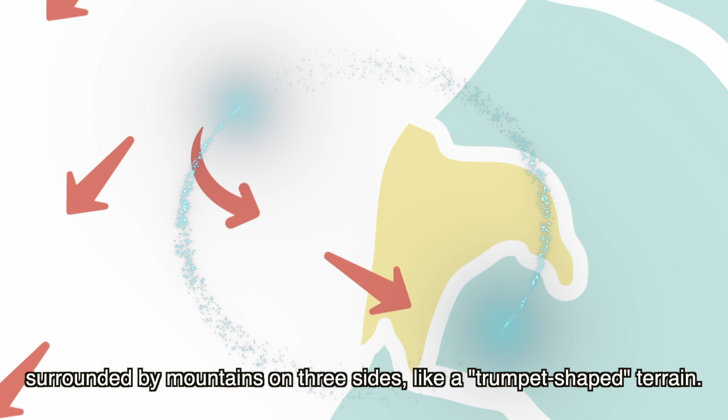Hsinchu Refuse Resource Recovery Plant. Hsinchu City is located in the northwest region of Taiwan, surrounded by mountains on three sides, like a trumpet-shaped terrain. Strong gales blow directly into the area, earning Hsinchu the title of Windy City.

Hsinchu is known as a tech town because Hsinchu Science Park is the bedrock of development for Taiwan's high-tech industry. It not only stimulates the advancement of domestic industries, but also marks Taiwan as a world-famous leading high-tech center.

Although Hsinchu City is densely populated, trash disposal is not a problem because the Hsinchu Refuse Resource Recovery Plant provides local residents with trash collection services and appropriate follow-up treatment. The facility is well designed and is now an ideal attraction for education, entertainment, and sightseeing.

The plant is located next to Nanliao Fishing Harbor on the 17-kilometer coastline scenic area, covering a total of 5.5 hectares. In addition to the Hsinchu City Environmental Protection Bureau building and incineration plant, the exterior of the recovery plant is designed by a world-renowned architectural firm, whose works also include the Luz Chapel and the Bali Refuse Incineration Plant.

The glass outer wall highlights Hsinchu's glass industry, and the building's silvery white and green hues are the perfect complement to a background of ocean waters, sandy beaches, and green land. The Hsinchu Refuse Resource Recovery Plant was officially launched in 2001 and has been in operation ever since. Currently, it is operated and managed by Rongfu Company Limited.

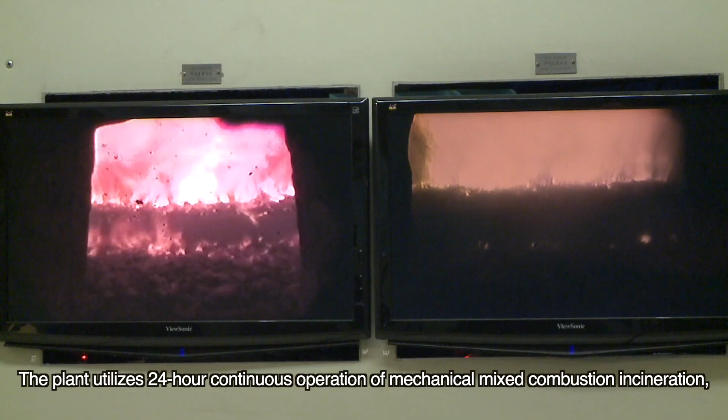The plant utilizes 24-hour continuous operation of mechanical mixed combustion incineration, and the maximum daily refuse treatment capacity is 900 metric tons. In addition to servicing Hsinchu City, it also cooperates with and assists in the treatment of household waste and general business waste for the greater Taoyuan, Hsinchu, and Miaoli region.

According to statistics, recyclable resources account for approximately 51.1% of total garbage, so recycle and reuse is extremely important. Household refuse can be divided into three main categories. The first is kitchen waste, the second, recyclable waste, and the third, general waste. Kitchen waste includes cooked food waste and raw food waste, which can be composted into organic fertilizer and returned to the land.

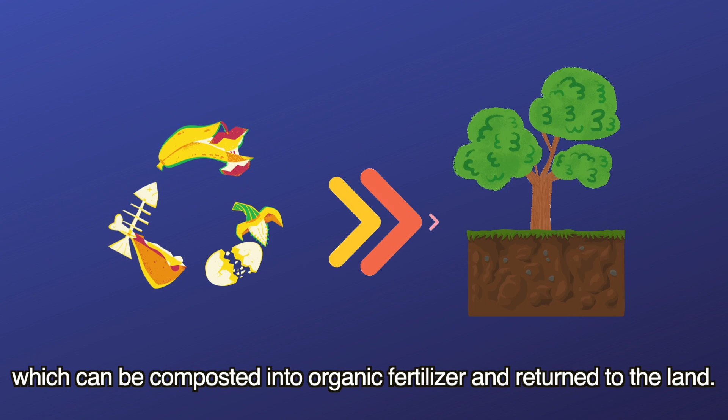Recyclable waste is trash that can be recycled and reused, including paper, glass, plastic, metals, and organic matter. With proper sorting, recycling, and reuse, it not only reduces burden on the environment, but also saves refuse treatment costs.

General waste refers to those other than kitchen waste and recyclable waste. It is divided into two types, combustible and non-combustible. Combustible waste is sent to the incinerator for high-temperature incineration treatment, while non-combustible waste is sent to the sanitary landfill.

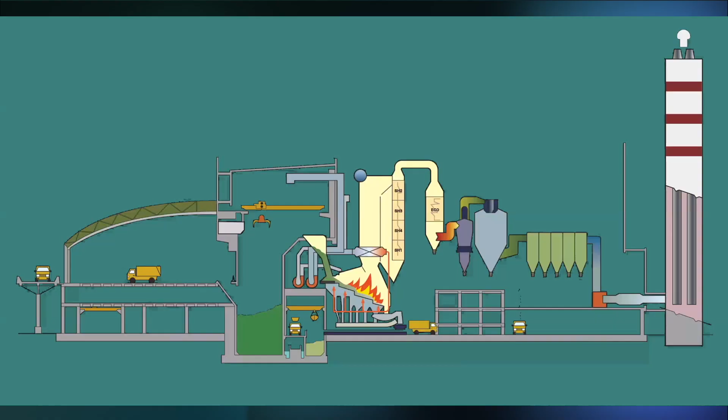But do you know how the previously mentioned waste incineration and landfills are conducted? The treatment process of combustible refuse includes refuse entering the plant, dumping, grabbing and transporting, incineration, flue gas treatment, and ash removal and disposal. Now, let me walk you through the entire process.

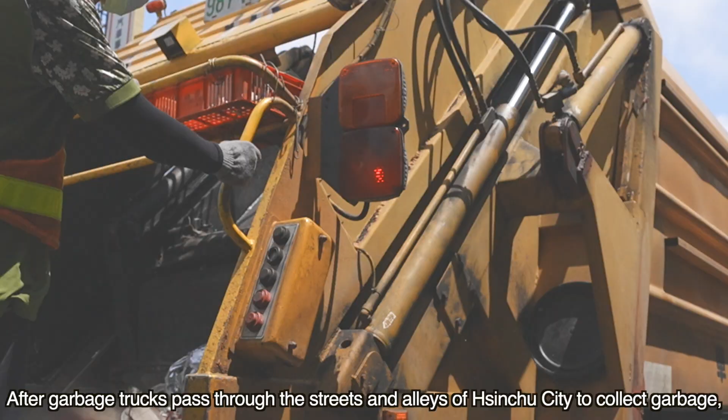After garbage trucks pass through the streets and alleys of Hsinchu City to collect garbage, they return to the Refuse Resource Recovery Plant. Upon entering the plant, the vehicle must first be weighed. At this time, the control room computer will immediately record the garbage weight and vehicle number.

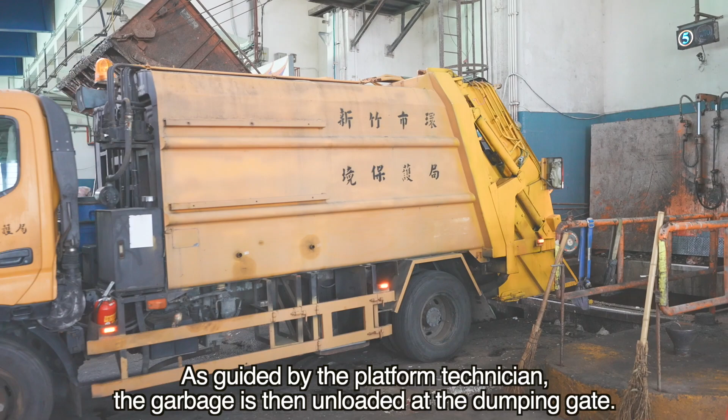Afterwards, the garbage truck goes up a ramp and arrives at the waste dumping area on the third floor. As guided by the platform technician, the garbage is then unloaded at the dumping gate. The plant has 12 waste dumping gates, and the capacity of the refuse bunker is as high as 10,800 cubic meters, which is equivalent to the volume of 95 tour buses.

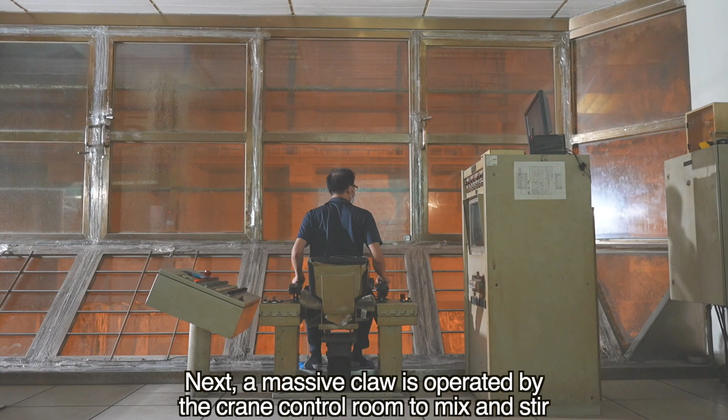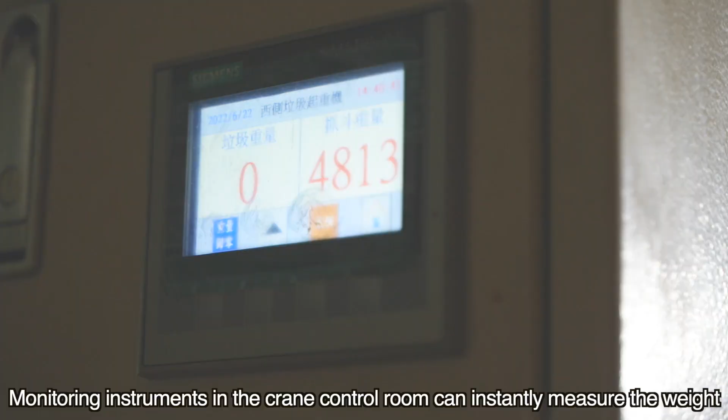Next, a massive claw is operated by the crane control room to mix and stir, then grab up the waste and drop it into the combustion furnace for incineration. Monitoring instruments in the crane control room can instantly measure the weight of the grabbed waste and record it on the computer. This operation is comparable to that of a giant-sized doll-grabbing machine.

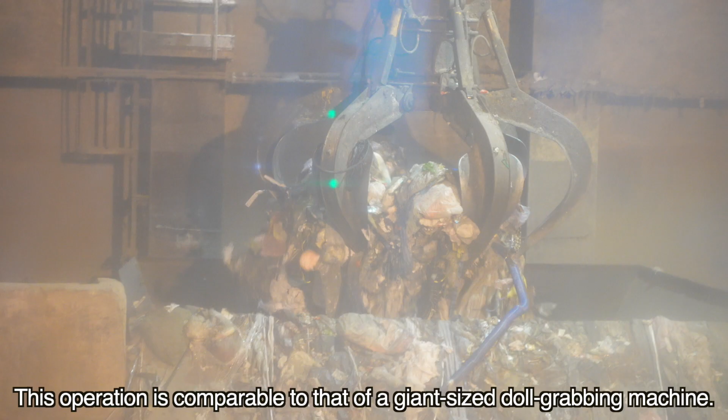The two furnaces in the plant are responsible for burning refuse 24 hours non-stop. This waste treatment method is mechanical mixed combustion incineration, which has the advantages of stable combustion and less pollution. The entire process is operated and monitored by the central control room 24 hours a day. Should there be any abnormalities detected by the control room instruments, the technicians would fix them immediately.

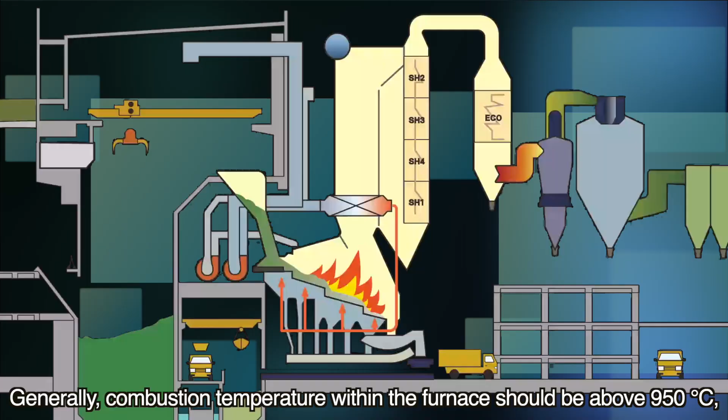Generally, combustion temperature within the furnace should be above 950 degrees Celsius, and the air temperature in the furnace is also around the same temperature. Since different types of garbage require a variety of combustion temperatures, the garbage proportion and content in the incinerator must be controlled to maintain temperature and stabilize combustion.

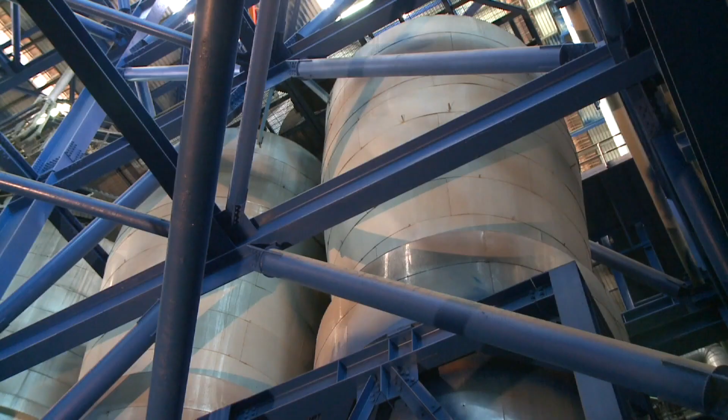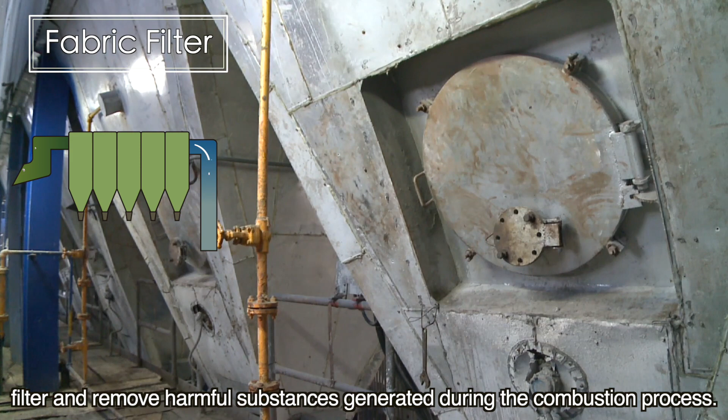The waste incineration process will generate flue gas. A high-efficiency cyclone separator, spray dry absorption, and a fabric filter are used to filter and remove harmful substances generated during the combustion process. The waste gas is then directed into the activated carbon system to remove dioxin. This flue gas treatment uses best available control technology, BACT, and only gas that meets emission standards is then sent to the stack for discharge.

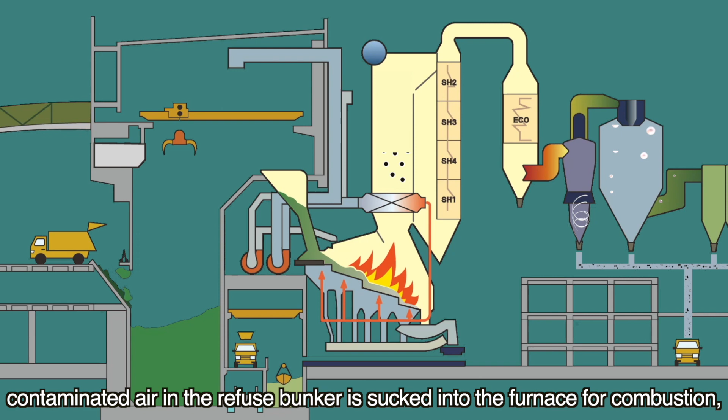Also, to avoid the leakage of odor, contaminated air in the refuse bunker is sucked into the furnace for combustion, simultaneously maintaining a negative pressure state and drawing fresh air from the outdoors into the facility.

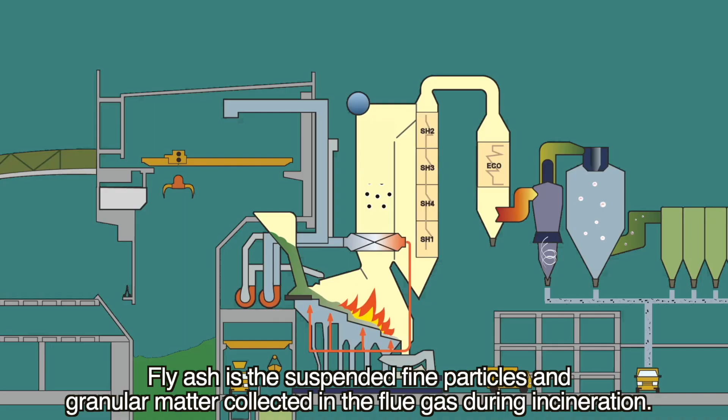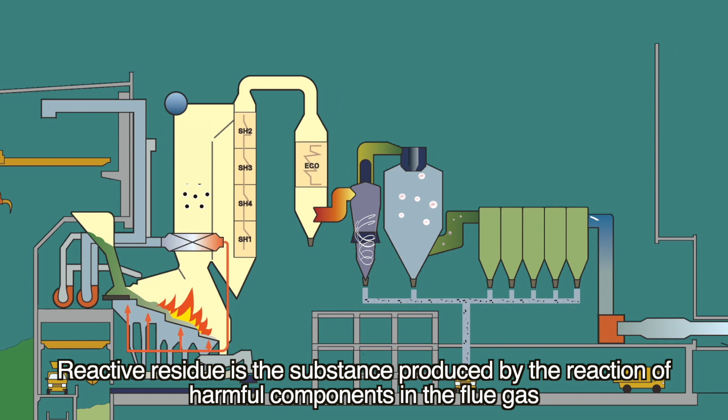Byproducts of refuse incineration include fly ash, reactive residue, and bottom ash. Fly ash is the suspended fine particles and granular matter collected in the flue gas during incineration. Reactive residue is the substance produced by the reaction of harmful components in the flue gas, together with chemicals such as slaked lime and activated carbon, both of which contain harmful ingredients like heavy metals and dioxin.

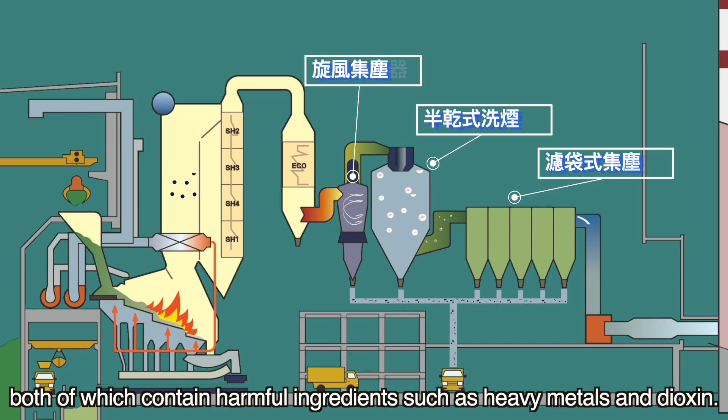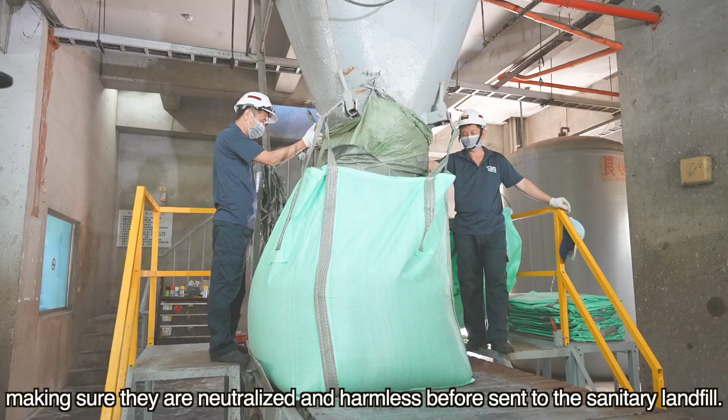To prevent fly ash and reactive residue from polluting the environment, the incineration plant uses sealed tankers to transport them to the solidification plant for treatment, making sure they are neutralized and harmless before being sent to the sanitary landfill.

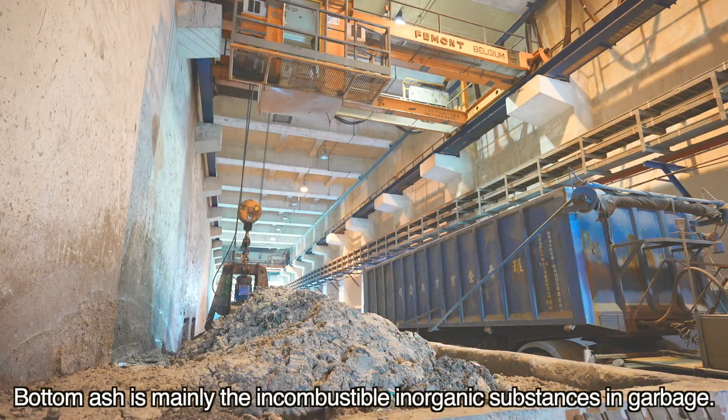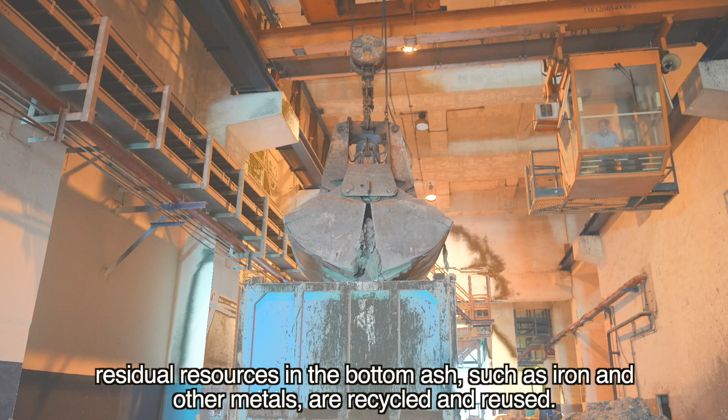Bottom ash is mainly the incombustible inorganic substances in garbage. To achieve sustainable reuse of resources and to prolong the service life of landfills, residual resources in the bottom ash, such as iron and other metals, are recycled and reused. As for the remaining bottom ash, part is transported to the landfill, and the rest is made into sidewalk bricks, turf blocks, drainage covers, and paved roads.

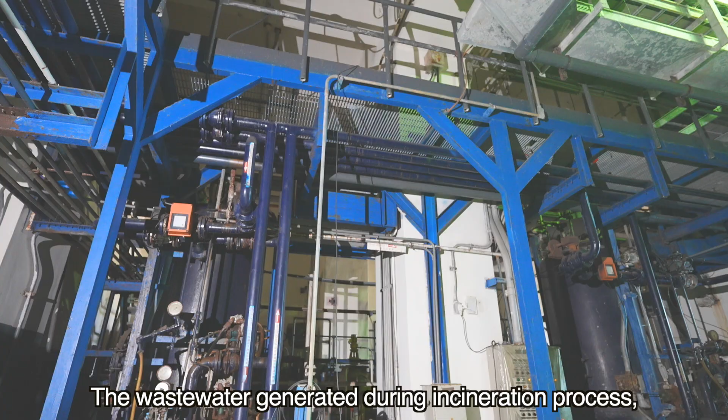The facility's wastewater is completely zero discharged. The wastewater generated during the incineration process, as well as those from facility activities and the refuse bunker, are all transported to the wastewater treatment plant to be recycled and reused for plant operations.

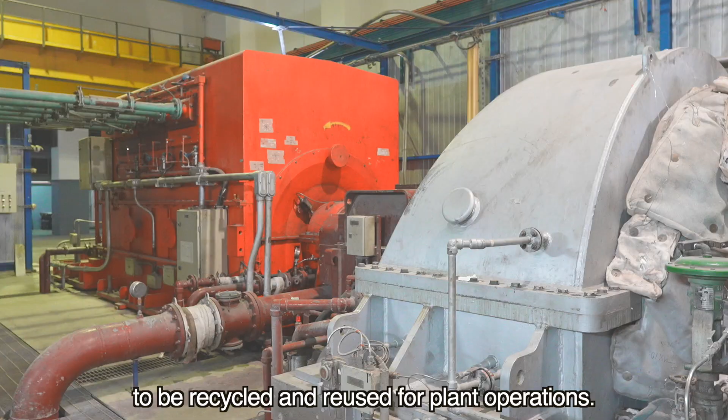The high temperatures created during incineration are used to generate electric power. Besides supplying the needs of the plant, excess electricity can be sold to the power company to achieve our goal of complete resource reuse.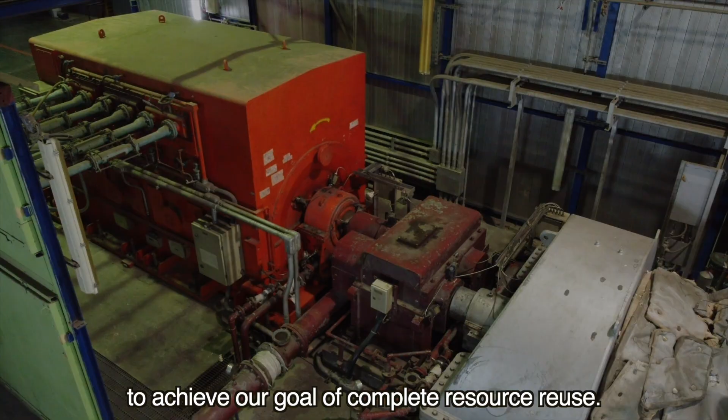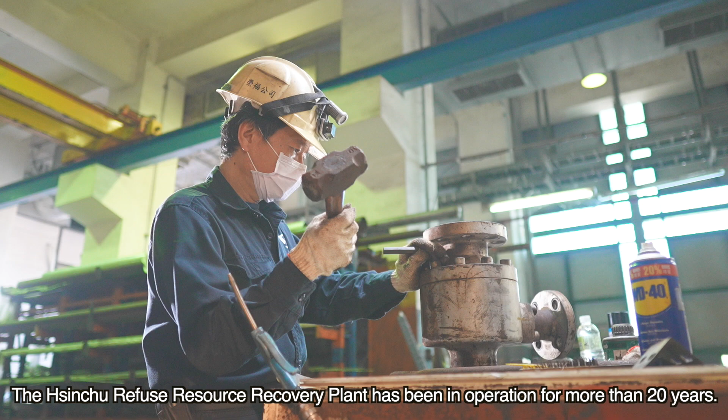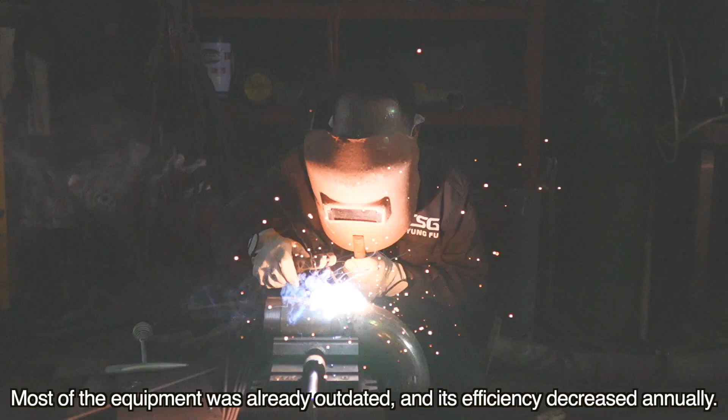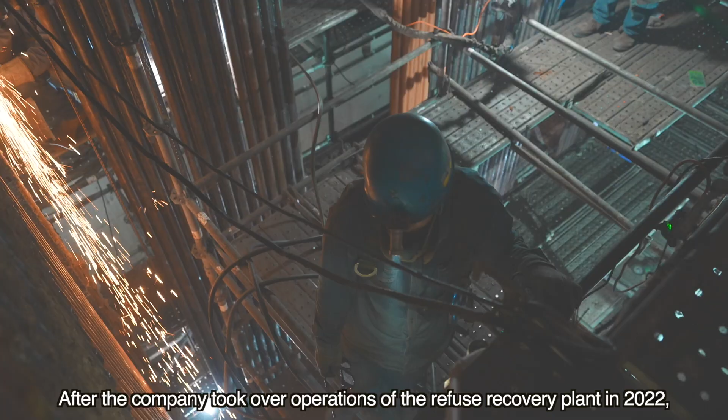The Hsinchu Refuse Resource Recovery Plant has been in operation for more than 20 years. Most of the equipment was already outdated and its efficiency decreased annually. Yung Fu Company Limited has had significant achievements in environmental protection projects. After the company took over operations of the refuse recovery plant in 2022, it immediately invested much manpower and resources into expansion and upgrading plans.

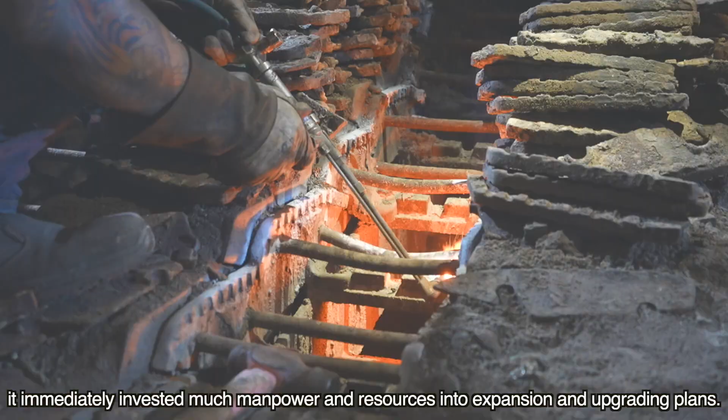All the equipment is either refurbished or replaced to ensure successful operation at the plant. This also included renovation of the swimming pool and surrounding facilities. Yung Fu Company Limited deeply values the ideals of sustainable management and strives towards environmental protection, social responsibility, and corporate governance, which are the ESG corporate indicators.

Since its initial launch, the Hsinchu City Incineration Plant was designed to integrate nearby coastal resources and scenery. Basketball courts, environmental protection parks, and coastal bicycle paths were built around the plant. In 2022, under the guidance of the Hsinchu City Environmental Protection Bureau, the Hsinchu Binghai Low Carbon Environmental Education Center and the Nanliao Leisure Sports Complex were renovated. They provide the perfect spot for Hsinchu citizens to relax, entertain, and exercise.

The Nanliao Leisure and Sports Complex is a combination of innovative and comprehensive design. In addition to a standard-sized swimming pool, there is also a children's pool, a spa pool, sauna, steam room, and parent-child showers. What's more, the warmth in this heated pool is supplied by the heat energy produced by the incinerator.

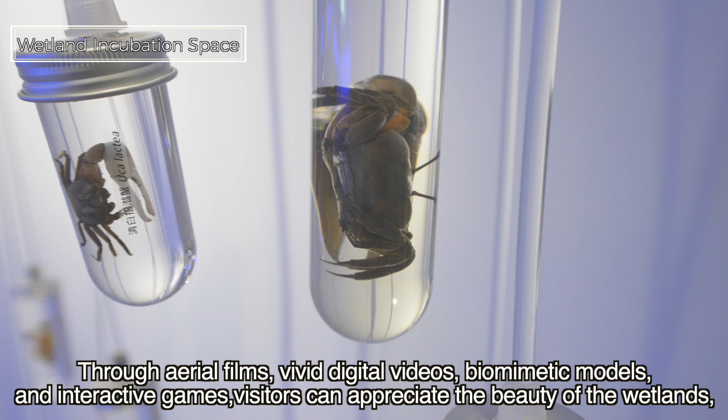This is the wetland incubation space. As we all know, abundant natural ecological resources have made Xiangshan wetlands the best natural classroom in Hsinchu. Through aerial films, vivid digital videos, biomimetic models, and interactive games, visitors can appreciate the beauty of the wetlands and personally experience the natural and cultural qualities of the coastline.

Now we arrive at the refuse and lifestyle section. Environmental awareness has become a global consensus, and the single consumption model of resources in the past has transformed into a revolutionary cyclical economy model. All the items in this exhibition area come from recycled waste. With ingenuity, they are remade into daily necessities.

Global climate change brought forth by the greenhouse effect is the most severe challenge of our time. Therefore, the utmost top priority for all human efforts is green energy. Here are the items that we use in our daily lives, and other information such as energy usage data, current local green energy power generation facilities, and green energy types.

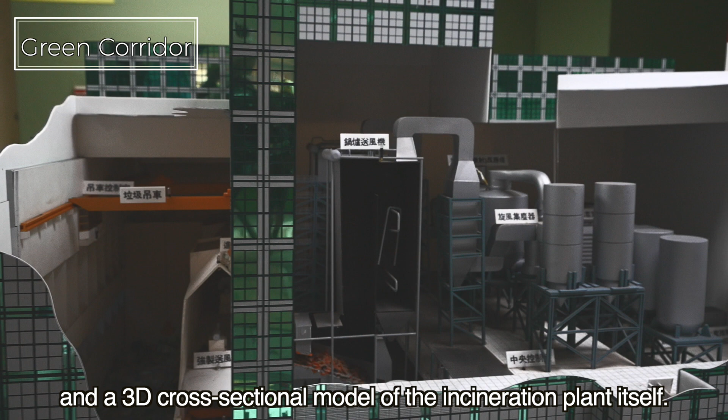The Green Corridor is located on the third floor of the incineration plant. On display is a detailed incineration process flowchart, a piece from the actual furnace and smokestack, fly ash, bottom ash, and recycled products, and a 3D cross-sectional model of the incineration plant itself.

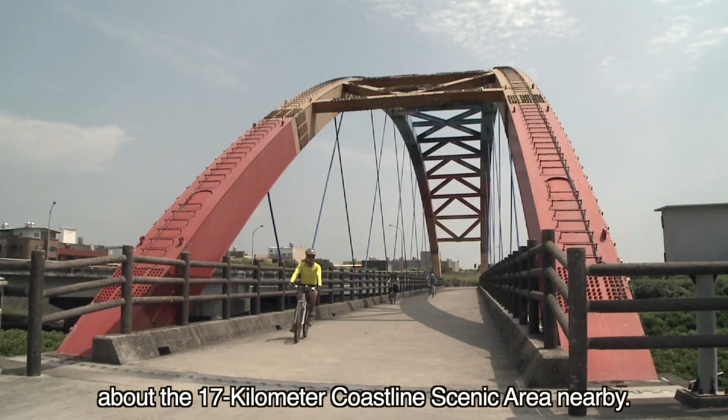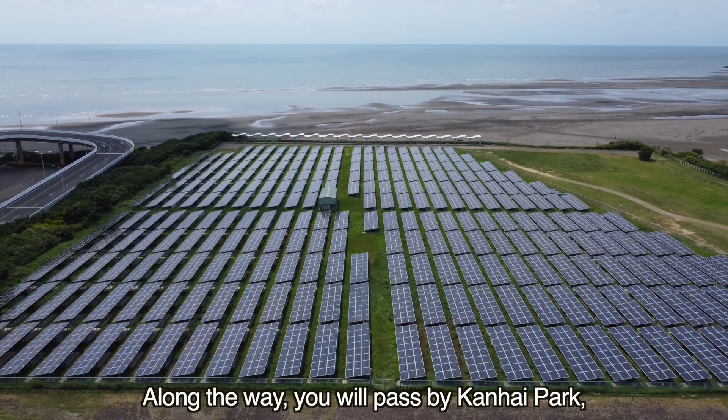When you walk out of the facility, don't forget about the 17-kilometer coastline scenic area nearby. You can enjoy the gentle breeze with a leisurely, pleasant bicycle ride. There are quite a few scenic spots along this coastline. Along the way, you will pass by Kanhai Park, Oceanic Skyline Viewing Area, Gangnan Coastal Scenic Area, Fengqing Coastline, Haishan Fishing Port, and Nangang Birdwatching Area. Each stop has a unique and distinctive scenery, so be sure not to miss them.

More importantly, this is the most ecologically rich national wetland in northern Taiwan. The diverse habitat attracts a variety of birds, shrimps, and crabs to dwell and forage here. The many kinds of sand-binding plants not only serve to protect the coastline, but also provide natural educational value and scenic landscape, and are well worth your careful observation.

After watching this introductory video, I'm sure you now have basic knowledge regarding the Hsinchu Refuse Resource Recovery Plant and gained a deeper understanding of the importance of environmental protection and actualizing waste reduction, sorting, and recycling. Now, it's time to fully implement these eco-friendly efforts in your daily life. And finally, a gentle reminder from the Hsinchu Refuse Resource Recovery Plant. Let us together learn and create a magnificent living environment that has low pollution and no harm, pure and clean, and is in harmonious coexistence with nature.